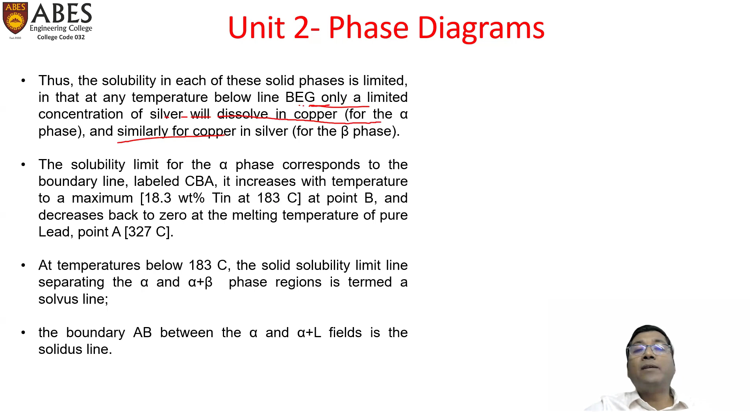The solubility in each of these solid phases is limited in that at any temperature below line BEG, only a limited concentration of silver will dissolve in copper for the alpha phase, and similarly for copper in silver for the beta phase. Below this line BEG, two separate phases would be present, solid alpha plus beta, and limited solubility would be there.

The solubility limit for the alpha phase corresponds to the boundary line labeled CBA: this C, this B point and A. Inside this, complete solubility was there, so alpha phase would be present. And similarly, beyond this H, G, F region, only single phase beta would be present. Complete solubility of one into another.

The solubility limit for the alpha phase corresponds to the boundary line labeled CBA. It increases with temperature to a maximum of 18.3 weight% tin at 183 degrees at point B, and decreases back to 0 at the melting temperature of pure lead, that is point A. Here the solid solubility is maximum, meaning roughly 18 to 19% of tin would get dissolved in lead at 183 degrees Celsius. Above this temperature, the solubility will go down and subsequently reduce to 0.

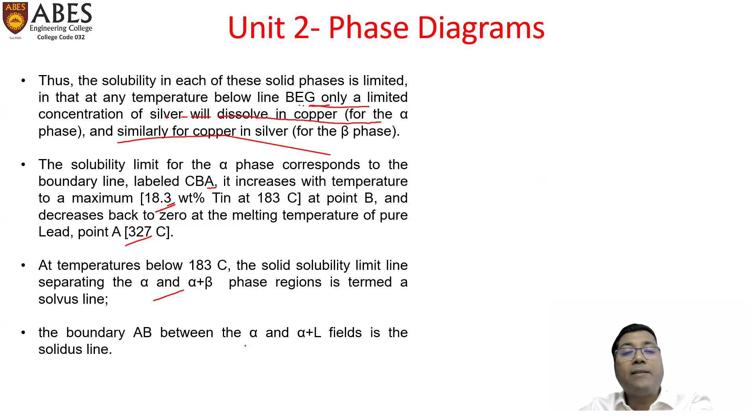The boundary AB between the alpha and alpha plus L fields is the solidus line that we have discussed. Similarly, for the beta phase, both solvus and solidus lines also exist, HG and GF. So HG and GF, these two lines are for beta phases.

The maximum solubility of tin in the beta phase, point G, is 2.2 weight% at 183 degrees Celsius. So this is 2.2 weight% of lead. So the tin would be 97.8%. So here it is mentioned 97.8% tin means 2.2% lead. So 2.2 weight% of lead is the maximum solubility in tin, 97.8%, at 183 degrees Celsius. Beyond that temperature, it will again reduce. The solubility will go down.

The horizontal line BEG, which is parallel to the composition axis and extends between these maximum solubility positions, may also be considered a solidus line. So this line BG is also a solidus line. This is solidus line, and this is solidus line. This is liquidus. It's mentioned this is liquidus and this is solvus, and again this is solvus.

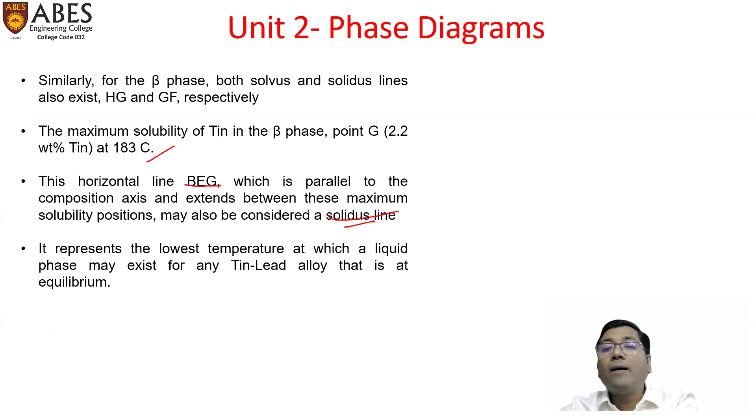Upon cooling, a liquid phase is transformed into two solid alpha and beta phases at the temperature TE. The opposite reaction occurs upon heating. This is called a eutectic reaction. When we cool down from liquid to two solids, and when we heat two solids to liquid at the same point, that is E point, when we cool a liquid from this region crossing this point, then at this point only it will transform into alpha plus beta, and simultaneously when alpha plus beta of this composition gets heated at this point E, it will instantaneously convert into liquid. This is called eutectic reaction.

To determine the fraction of phases at the eutectic point in the tin-lead system: at point E, C alpha, the weight percent of tin in alpha, is 18.3. The composition of alpha would be 18.3, beta would be 97.8, and Ce would be 61.9. So we can calculate the mass fraction of alpha. Since alpha is this point, mass fraction of alpha would be the opposite arm, GE divided by total BG, means C beta minus Ce upon C beta minus C alpha. And when we calculate this, we will have 45.2% mass fraction of alpha phase.

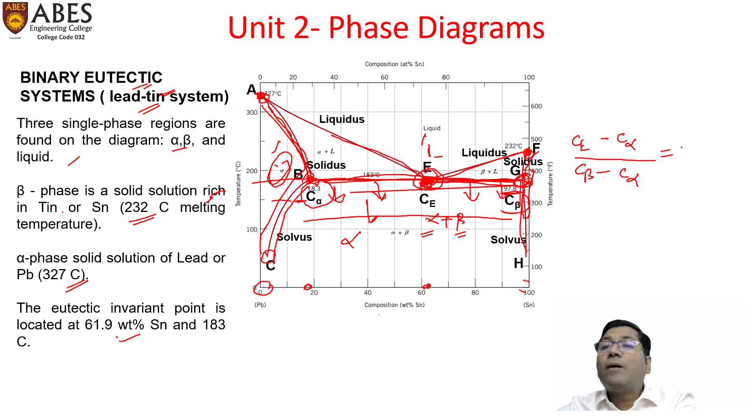And beta phase, how can we calculate? Opposite arm. Opposite arm is this BE. So BE upon BG. That we can write as Ce minus C alpha upon C beta minus C alpha. This will be equal to W beta. So W beta is the same thing we have written there.

Ce minus C alpha upon C beta minus C alpha, and that comes to 54.8%. So the combination of alpha and beta at point E is 45.2% alpha and 54.8% beta. This is how we can calculate from the phase diagram; we can interpret the mass fraction of both the phases present and how the phases are changing as per the composition and temperature variation.

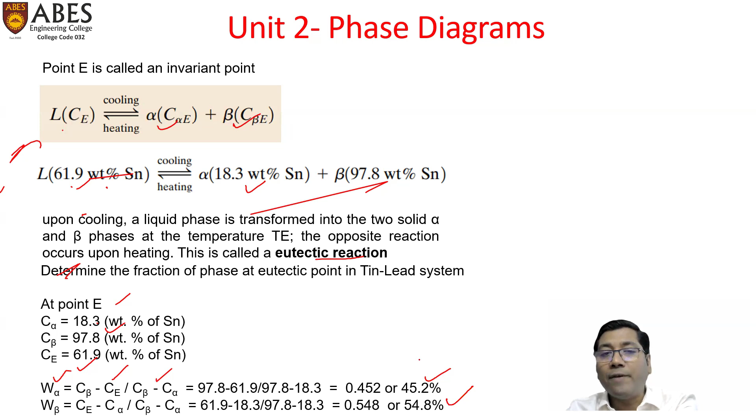Development of microstructure in eutectic alloys. How can we interpret them? So first, let us take an example of point C1. This is point C1. This C1 has a composition where it is not going beyond this solvus line and this solidus line. This is cutting only the solidus line.

So when we cool this composition from 380 or 350 degrees Celsius along this vertical dotted line, we have a complete liquid phase here where this single phase would be present. Then at this point, both liquid and solid would be present, and then complete alpha would be present. It's a single phase alpha, and till room temperature only alpha would be present.

Similarly, if we consider this C2 point having the composition around 15% tin in lead, and we cool it from above 350 degrees Celsius, at this D point it is a completely liquid solution having C2 weight percent tin. Then at this E point, we'll have a combination of alpha and liquid; alpha is solidifying. Then at this point, it changes completely into whole alpha.

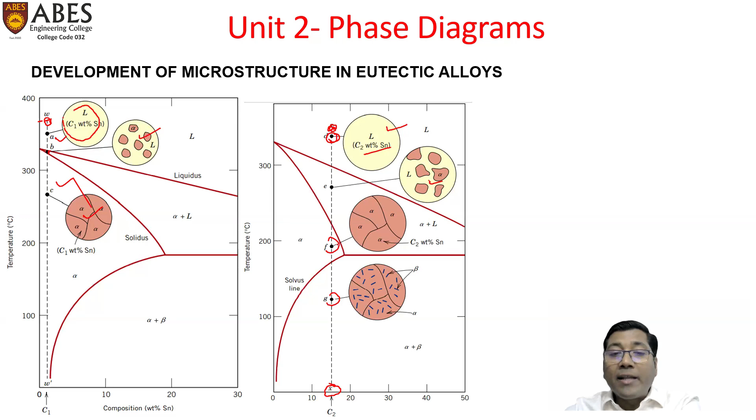And then when it goes down below this temperature, due to limited solid solubility, it will again change into two phases, alpha plus beta. So here the microstructure would be alpha plus beta. How this microstructure changes at different temperatures gives the properties of the material at that temperature, as we discussed earlier.

Similarly, when you consider the C3 point, C3 is the eutectic composition. So if we go down from this H point, we consider the 61.9 weight percent tin combination; at 250 or 255 degrees Celsius, this is completely liquid.

And when we reach this eutectic point and just below it, we have just alpha plus beta, two types of solid. The weight percent would be alpha 18.3% and beta 97.8%. This is in the form of alternate lamellae, alternate layers of alpha and beta. This is a typical alpha plus beta combination, and till room temperature it would be like this.

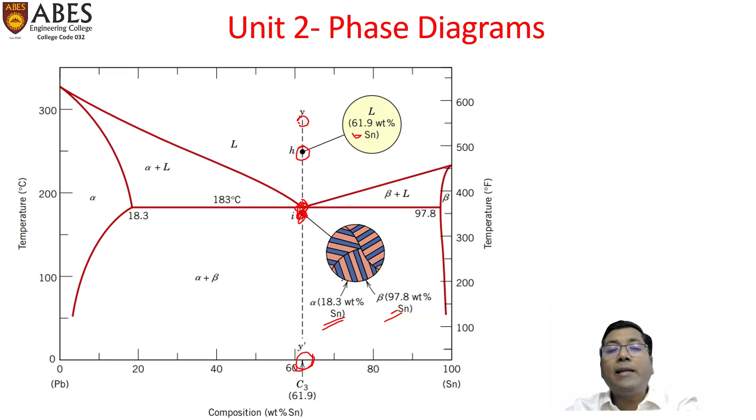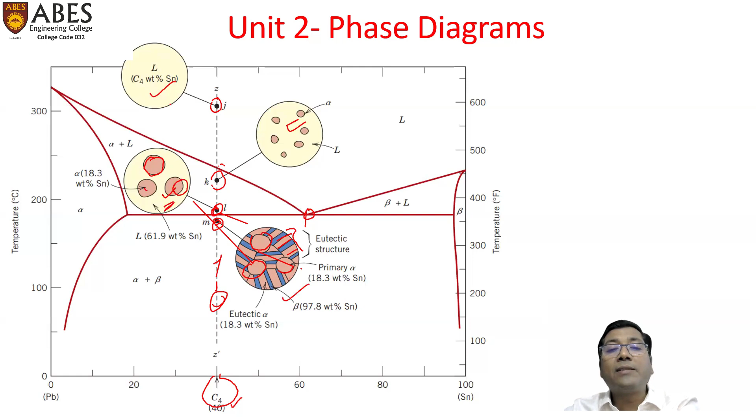The mass fraction of beta would be the opposite arm, P divided by P plus Q plus R. It is written here: P upon P plus Q plus R equals C4 dash minus 18.3 divided by 97.8 minus 18.3. So it will be this figure. And W alpha would be the opposite arm, Q plus R upon P plus Q plus R.

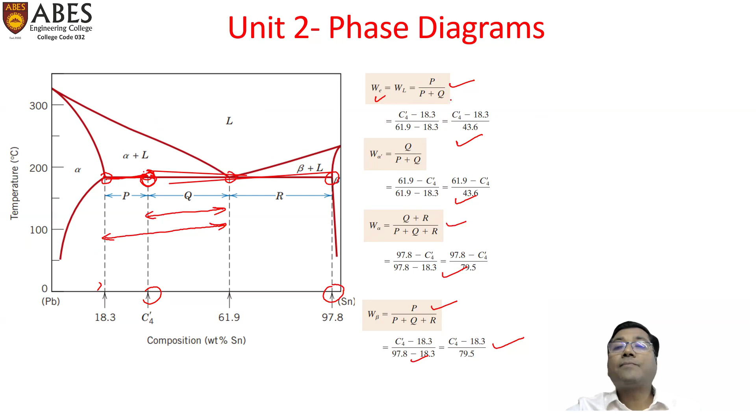Similarly for alpha dash, the primary alpha, it is Q, the opposite arm, divided by P plus Q. And W eutectic equals WL equals P upon P plus Q. Similarly, we can calculate these values. So this is it as of now.